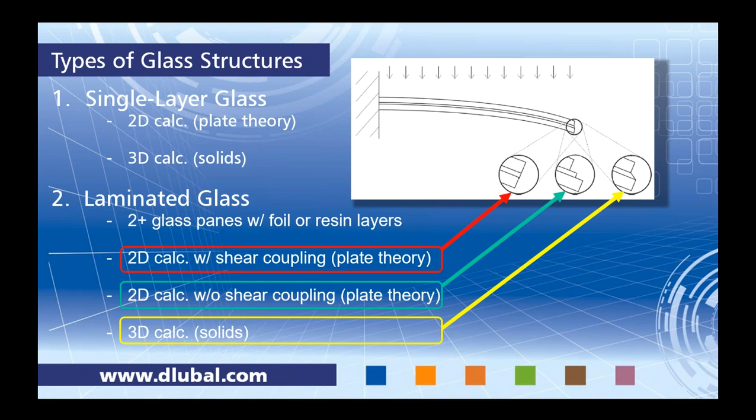Like I said, this is certainly the most accurate option. A downside to this, though, is that your solve time will be longer than typical plate theory.

Now, the third option is insulated glass, shown here by this picture. We have two glass panes on either side, a primary seal, a secondary seal, and then a spacer with our gas in between the two glass panes.

This will always use large deformation analysis. With the other two glass types, we can do a linear analysis or a large deformation, and typically with plate theory, you're running a linear analysis. But for insulated glass, we actually only give you the option for 3D calculation with solid elements. That's because when you throw in this gas layer, there's really no other way to get the accurate behavior of the shear coupling between the glass layers with anything other than solids, meaning that plate theory with 2D elements is not applicable for insulated glass.

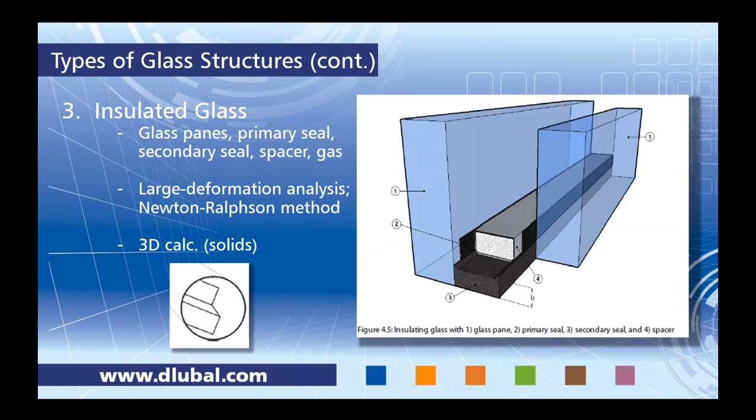And I want to now discuss the calculation types in RF-GLASS. So over here on the right, this is our add-on module, RF-GLASS, just a dialog box. Down at the bottom, you will see that we have two different calculation types to choose from, either local or global. This whole section might seem a little bit confusing now, but I think as we run through our examples today, it will make more sense.

So the first being a local calculation. That is where an individual glass surface is analyzed in RF-GLASS. Despite having any supports or boundary members drawn in RFEM, we have to redefine those supports and boundary members in RF-GLASS. With the local calculation, we can either do a 2D or 3D plate theory or solid analysis. And with insulated glass, this always falls under the local calculation because, like I said, we can only do a 3D analysis type with insulated glass.

Now, the other option is a global analysis where the entire model in RFEM is considered. So therefore, things like supports and boundary members that were originally modeled in RFEM will be taken into RF-GLASS. The caveat with this is that we can only do 2D plate theory for this type of analysis.

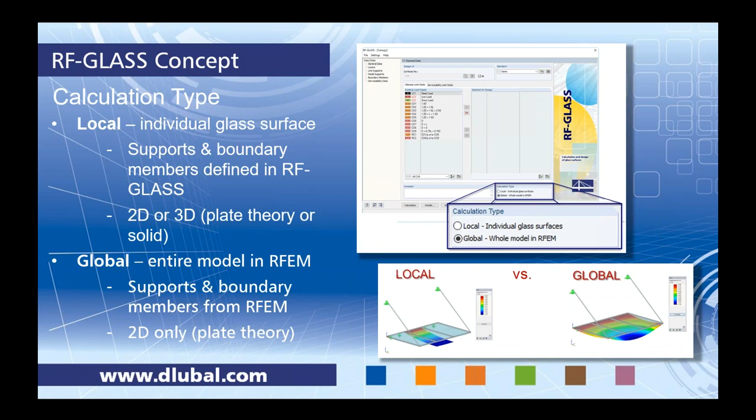So you're probably wondering, well, why would I ever want to do a local calculation if I have to redefine supports and boundary members? Two reasons for that. One, we cannot do a 3D solid analysis with a global calculation, so if you have insulated glass or very thick glass layers that a plate theory won't give you accurate results for, the only option is to run a local calculation. The other reason is that the support types as well as the boundary members can be identified in RF-GLASS in much more detail than what you could ever do in RFEM. That's kind of the advantage — we'll see that when we go through some examples today of local versus global.

So with that, we can jump into RFEM. When you begin a new model, you will see this general data box pop up. We just need to first give it a model name, so I just gave it some arbitrary name.

I have the load combination set to ASCE 7. You can see here that we have the Canadian load combinations as well as many international codes as well, and then I have the checkbox to create those combinations automatically. I also always open up my template model. Any model can be saved as a template model, meaning that maybe you have your grid settings the way you'd like, your printout report, your unit set exactly how you want. So then every time you open this template model, everything is ready to go, and you don't need to adjust anything next time when you open up a new model.

So if I click OK, then this will go ahead and open up a new model for us. I'm not going to spend too much time today on modeling techniques — we're really just focusing on glass analysis today, but if you are interested more in general modeling in RFEM, we certainly have plenty more webinars such as this recorded on our YouTube channel. So how I'm going to begin now is I'm going to draw a line element.

You can see here that we have obviously a single line element, but we have many more options such as polylines, ellipses, arcs. Basically any CAD-like feature, you're going to find a lot of those in the program itself.

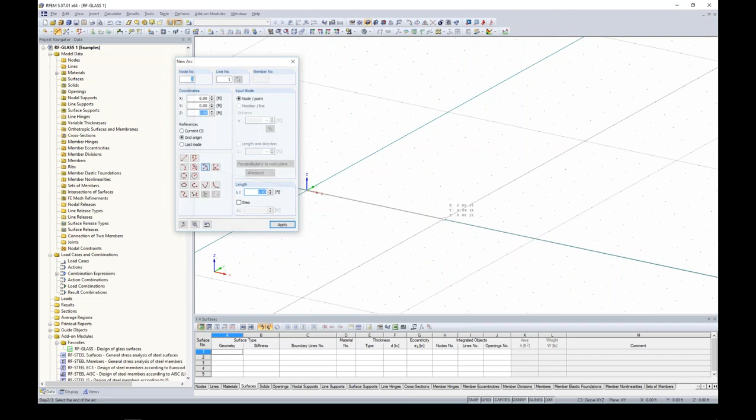For this option, I'm going to choose an arc by defining first my points at 0 and 0, and then I'm going to use my snap point to 6 feet. Now you can see I want to define my radius. I want to actually reverse the orientation and define my radius at 6 feet. So now I just have a simple line element.

This isn't a member, it's just a line. And then I can actually select this line, right-click, and extrude the line into a surface.

If you were present in my last webinar on cross-laminated timber, the glass module somewhat acts the same way. The program is asking us now what material we want to use when extruding this line into a surface. Realistically, this doesn't matter right now for glass. This concrete is just a placeholder, so it doesn't matter if I choose concrete, steel, or aluminum. It's just simply a placeholder.

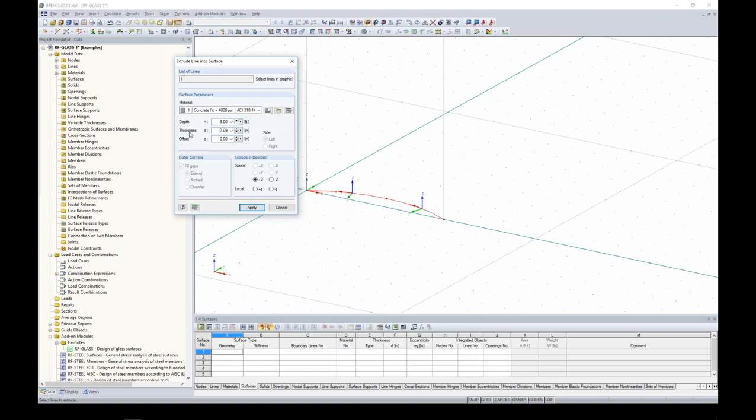The height, though, we do want to specify the correct geometry in the program, with the exception of the thickness. Thickness doesn't matter either because all of our layers and such we will be defining in RF-GLASS. So if I hit apply, I can see that I have this surface now created with just a few clicks of a button.

The next thing to consider is maybe we have some type of handrail on our glass panel here, and I don't want to model the handrail itself, but I'd like to create a line so that I can add a line load to this surface.

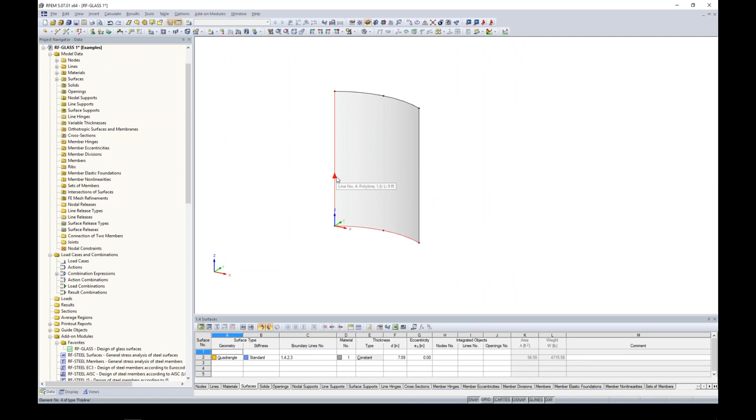So all I'm going to do is select this bottom line here and use my move and copy tool to move it up 3 feet in the positive Z direction. Now you can see that that line is integrated in that surface.

So quickly adding some load cases. Here I will go ahead and add my first load case, dead load, and you can see that self weight is automatically checked on for self weight.

I'm going to create a new load case called wind load pressure. You always want to define the correct action category, and the reason why is the program automatically created all of these ASCE load combinations. If you don't apply the correct action category, you're going to get the wrong load factors.

So I'm going to make a quick copy of wind load pressure, but call this one suction, and then make one more load case of live load and give it the live action category. Okay, so I can click OK here.

Now, if I go to my drop-down box, you'll see that the program automatically created all of those ASCE load combinations. I'm going to skip dead load for now, we'll just consider self-weight, but for wind load pressure, we want to add our first surface load.

If I right-click, I can turn on my local axis system, and I want to add a new surface load. Because we have a curved surface, I want to apply this wind load pressure on my surface in the local Z direction. You'll notice down here the little picture updates depending on what direction you're applying your load to, which is nice. So in this case, I want the local Z direction.

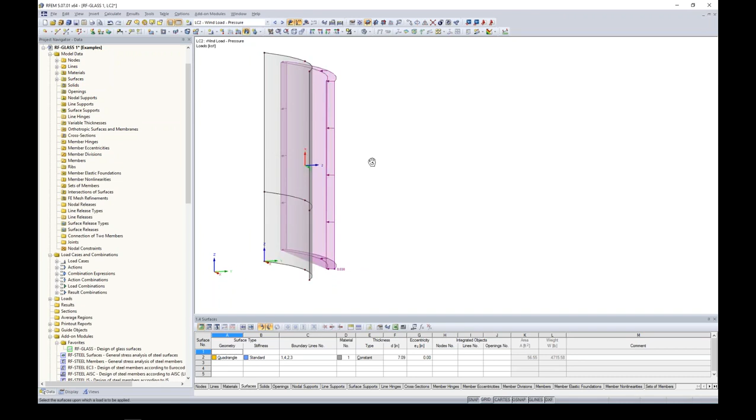I'm going to switch load cases to suction. I'm going to again add a new load in the local Z direction, but this time it will be 0.02 KSF on the other side.

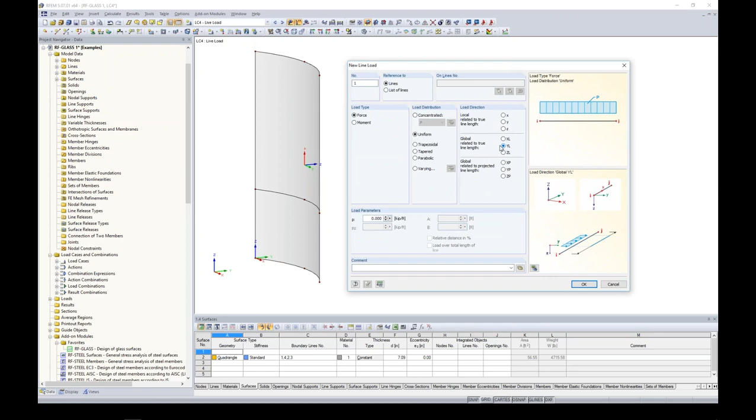And then lastly, we have live load where I will add in a new line load. This I'm going to apply in the global Y direction with a magnitude of 0.07, and then all I need to do is click on that line. So now we have all of our loads added to this surface.

All of our load combinations are done. I want to check my finite element mesh settings. So if I go to calculate and FE mesh settings, the default is set at 1 foot.

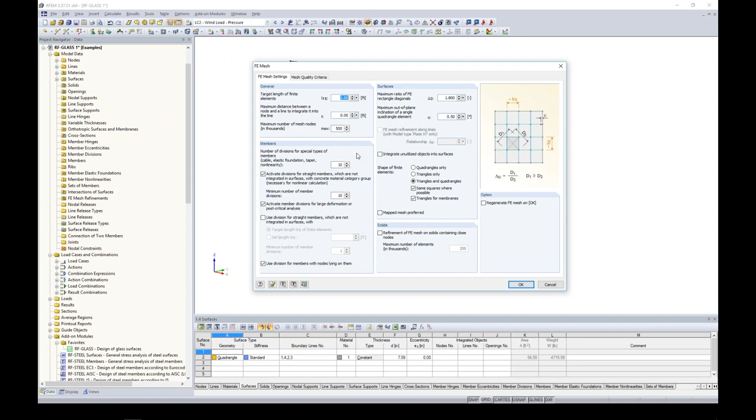The length of 1 foot would probably be okay in this situation since we don't have much going on in this surface, but it is only 6 by 9 feet. So maybe we want to decrease this to something more like 0.5 feet.

If I go to calculate, generate FE mesh, now we can see the FE mesh is automatically generated. Keep in mind this is different than some of the other programs in that all finite element meshing is done automatically. If I were to move this line up an inch, everything would automatically be readjusted, so you never have to worry about changes happening in your model and the finite element having to readjust that manually. Everything is done automatically.

Now we are ready to jump into our add-on module. We have this extremely long list of add-on modules, but if I right-click on any of them, I can select it as my favorite, which will automatically move it up to the top of the list. So now I can launch RF-GLASS.

Taking a look at RF-GLASS, as I mentioned, this is the add-on module, nothing more than a dialog box. You can see here that all of our load combinations were brought over from RFEM. The first question it's asking us is what surface do we want to go ahead and design, and you can check the all checkbox since we only have one surface.

The other couple things to note here is that we do have the German annex for the standard to go ahead and do glass design. For us, we're going to be doing just an analysis, so we will be choosing no standard. There's a little bit of a translation issue right now, but don't worry, that will be fixed soon. This is none in German.

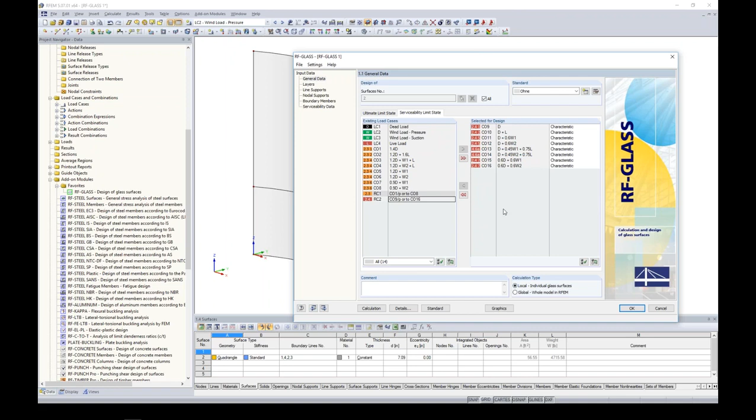Remember back to the PowerPoint, this is what we were discussing on local versus global. My two examples now will be local, so the first one will be local, individual glass surface. We'll focus on that and then we'll get into global a little bit later.

With any add-on module, you just simply work down the list, extremely intuitive to use. The program kind of sets up your workflow for you.

So we're moving on to layers here. It's asking us, okay, so we can create a new composition. You can rename this, and you can create as many compositions as you'd like for different surfaces in your model. For us, we'll obviously only have one composition for our one surface. We need to select which surface this applies to, and we can define our first layer type.

Our first layer type will be glass, and here will be the option to jump into our material libraries database. Typically the standard when you select this will be under the material category glass, and all of these options will be listed. We don't quite yet have the ASTM materials in there, but really that's no problem at all. I added this thermally toughened float glass to my ASTM standard.

Anytime that you add in a new material, this will of course be remembered for any future files or models that you were to create with this glass module. All of our properties are shown in the same dialog box, so everything is okay there. Now my thickness, I want it to be 0.2 inches. Again, all of our material properties are shown to the right here.

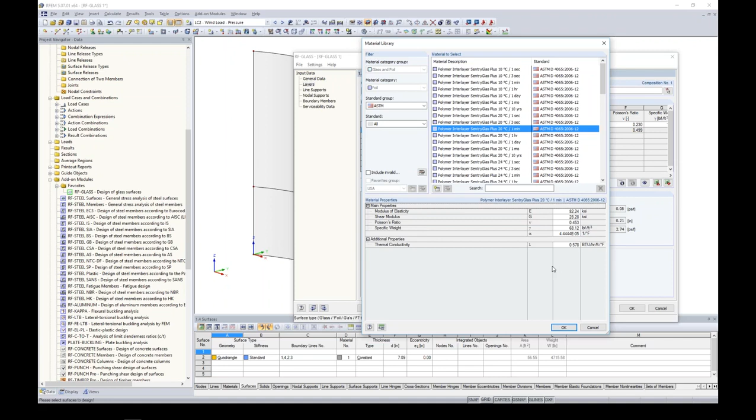Our next layer will be foil, and with this, believe it or not, we actually do have a lot of ASTM foil materials already integrated in the program. For this particular case, I will use 20 degrees Celsius at 1 minute. Again, the foil material properties are shown here. The thickness of 0.01 inches is fine.

And lastly, I choose my last glass layer. The program's smart enough to know that I used ASTM for my last glass layer. I'll also use the same thickness, so that's nice that we don't need to go back into the material library. We don't even need to define a different thickness if we don't want to.

One thing to note here, you can export or import directly from Excel. So if you have some crazy complicated glass layering going on and you have all the properties defined in the same format in Excel, at the click of a button, you can go ahead and import it directly into the program.

So I'm going to edit my composition details, and this brings up a lot of what we were discussing in the PowerPoint. You can see here with my method of analysis, I have either a linear analysis or a large deformation analysis to choose from. For right now, I'll just go ahead and stick with the linear analysis.

Now, the modeling of the laminated glass, I have either 2D or 3D, so we understand plate theory versus solids, but this third option is something we didn't discuss. The program can automatically turn a 2D model into a 3D solid element model if the ratio of the shear modulus times the thickness of the glass over the shear modulus times the thickness of the foil is greater than some ratio. The default ratio is 1,000, but you can change this to whatever you'd like. So if your depth of your glass layers is getting a little bit too thick for a plate analysis, the program can automatically turn that into a solid model. For us, we'll just stick with 2D to keep it simple for this first example.

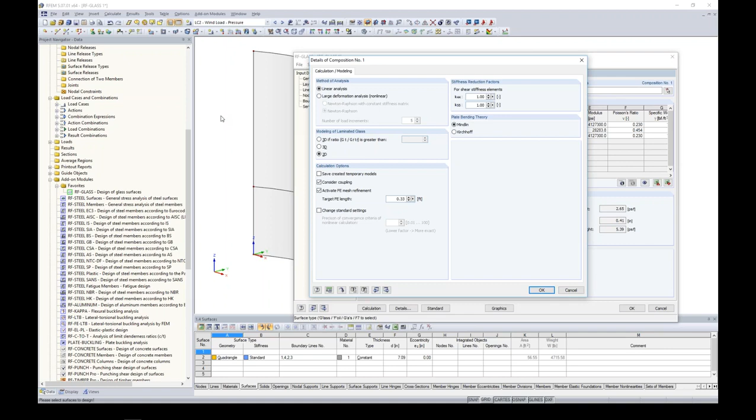Consider coupling. Remember, with plate theory, we either have rigid coupling or no coupling at all. If I uncheck coupling, I no longer have the option to turn it to a solid analysis. Activate FE mesh refinement—this is if you wanted to change your FE mesh of this surface only, or any of the surfaces that you define for this composition. This is nice because I don't have to go back into RFEM and redo my finite element if all I want to change is the surface in here. So that's certainly an option as well.

Okay, also notice that we get this nice picture here of the different glass layers. Depending on which line I'm clicking on here, this arrow will be synced with whichever layer is shown in this little diagram. Something important to note here: the local axis Z, the positive direction, is facing towards the bottom of the glass. So this is the bottom of the glass, and know that the positive Z axis of our surface is also pointing towards the bottom of the glass.

So for this example, it doesn't really matter because we have symmetry between the top and bottom layers, but our next example will be different than that because we won't have symmetry. So you want to make sure that the local Z-axis and the bottom of your glass are aligned correctly.

All right, moving on down our list, line supports. In RFEM, I didn't define any line support. So if I were to try and run that model right now, I'd obviously get an instability because I have nothing supporting that surface. So this is where I was telling you, in RF-GLASS, we can go ahead and define these line supports.

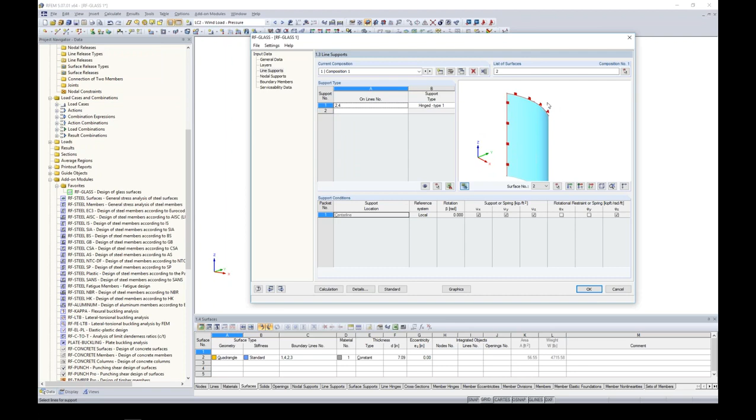The first thing that I need to do, and you'll notice here I have my picture, I can rotate it, I can scroll in, is to choose my first lines. So if I choose them graphically, using my AutoCAD type features of just dragging a selection box, I chose the left and top lines here.

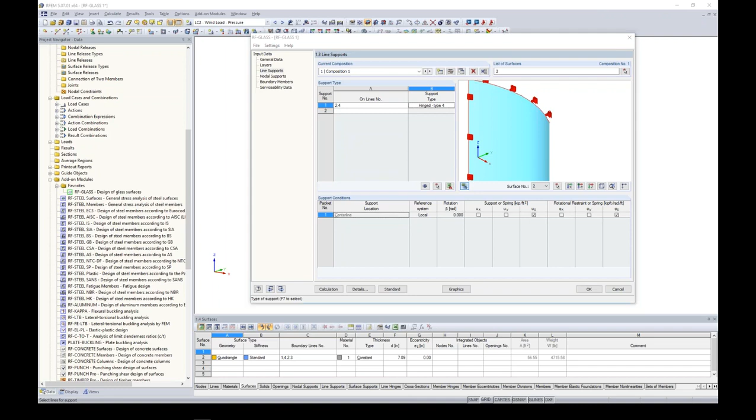And if I click on support type, you will see all of these different hinged options. As I go ahead and scroll through these, you'll notice that the support types are changing down here. If this still doesn't make a whole lot of sense to you, you can always click on this help manual here, and what this does is it will bring up our manual for RF-GLASS, and if you scroll down just a little bit, here are all these different hinge types.

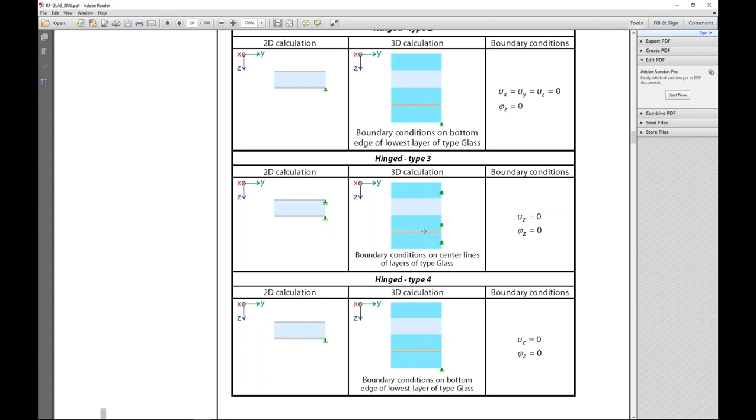And it's nice because it's set up in a way that, okay, if you're doing plate theory under the 2D calculation, this is how the hinge type will look. Now, if we're doing a solid model, this is how the hinge type would look—hinge type 1, hinge type 2. So this is what I was saying, that the benefit of using a local analysis in RF-GLASS is that you can get very detailed in how your glass layers are supported. In RFEM, you don't have these options—you can do it, it's just much more complicated. So in RF-GLASS, it allows you to get a little bit more detailed.

So for us, we will choose hinge type 3. Then I want to choose my other 2 lines here.

And I can always select a user-defined type as well. I don't have to use these already determined hinge types in here, and maybe I want to unselect translation in the X direction. Keep in mind you can always select springs as well, so you don't necessarily just have to have a free or fixed situation.

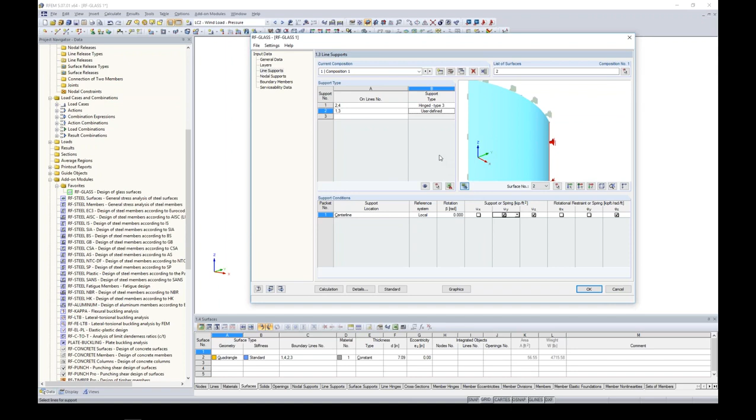Moving on down the line to nodal supports, exact same concept. Just if you were to have nodal supports instead of line supports, this is where you would go ahead and define it. Boundary members - so it's not uncommon to maybe have something like a channel member up at the top here of our glass surface.

Well, I didn't model that in RFEM, and because I'm using the local glass analysis type, I want to define that boundary member here. So the first thing I need to do is select where I want that member to run. You'll notice everything is just set to center line because I'm using 2D plate analysis - I don't have any cross sections defined in RFEM.

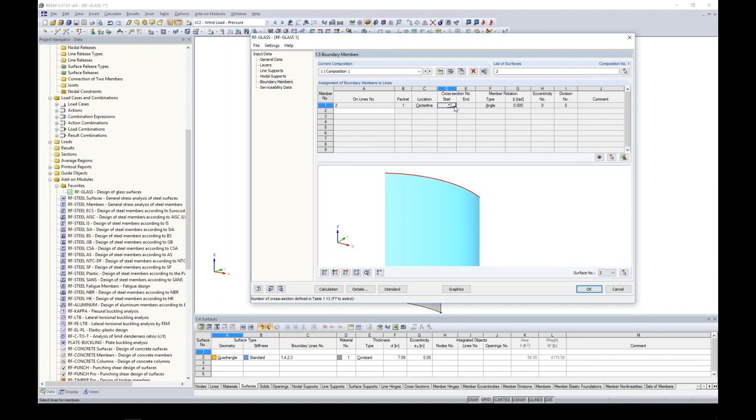Normally you would think, okay, I probably need to go back into RFEM to create some cross sections, but the nice thing is I can do everything from this add-on module. So up pops my cross section library. For this case, maybe I'll choose a type of channel here just for geometry purposes, and here are all my AISC shapes. Maybe I want a 3x5.

Concrete is obviously not the right material for this, so we can easily edit this as well and jump into our material database. Maybe we want something more like aluminum from the ADM. Well, I already have aluminum set in one of my favorites group for USA as 6063 T6. Here are all of my properties for that particular material.

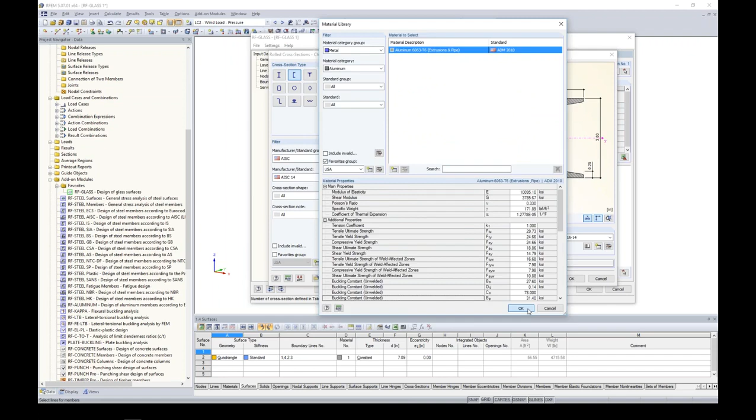I can click OK on all of these, and if I zoom in, I have a nice rendered shape of my channel. You can also rotate it if you need, and the program will automatically update that as well.

So for analysis purposes, we certainly want to take into account the stiffness from this member here - that's the whole purpose of defining boundary members. Maybe you have a boundary member with nodal supports on either side instead of a line support. That can all be modeled in here as well. So this is just for example purposes - I will delete this for now.

And lastly, we will jump into the serviceability data. This is nice in the sense that if I go to my standard button down here, I have my serviceability limiting deflection ratios. I have 3 different types of combinations - characteristic, frequent, and quasi-permanent - and you can see I can change these ratios for these 3 different combination types to whatever I'd like. Default is L over 100, and for cantilevers it's L over 50.

If I go back to my very first tab under serviceability, here's where those 3 different combination types fall into place. So if you want different limiting deflection ratios for these different serviceability load combinations, it's possible to do it in one analysis without having to rerun several times with different deflection ratios.

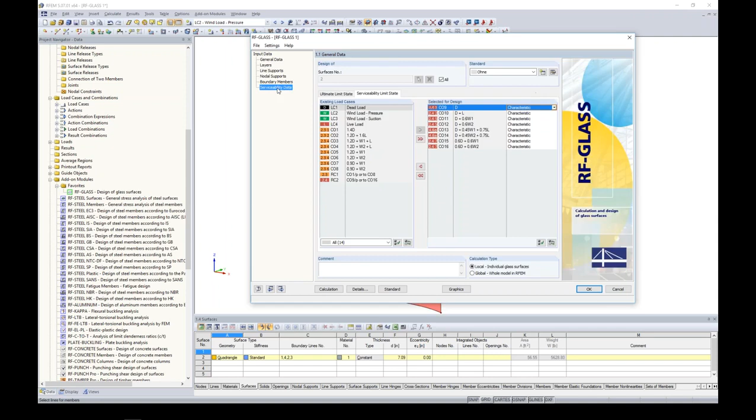The only thing I need to define is my surface. Now the reference length - do I want to use the minimum borderline, the maximum borderline, or do I want to define my own? In our case, a conservative option would be the minimum borderline at 6.28 feet, and if it was a cantilever, I could check this option here.

Last thing to check is the details button. You can see we have all of these options for what stresses we want to show in the final analysis, so I can easily uncheck any of these if I don't want to see them, or check them if I do. Under the results, there are a few other options for what you want to see in your calculations - for example, maybe we want to see line support reactions.

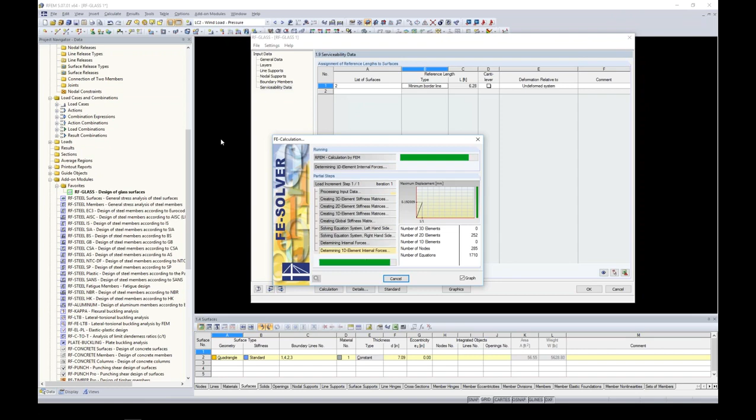And with that, we are ready to solve. So what the program's doing now is taking each stiffness layer from the glass, creating a more global stiffness, exporting it back into RFEM, rerunning the analysis, and now bringing all of the results back into RF-GLASS. And now we have this results menu available.

Here we can view our max stresses and our ratios by either the loading. So we have our different load combinations, load combination number 1, number 2, number 3, and remember this is ultimate limit design. We also have our max stress ratio by the surface. We only have one surface defined, so of course we only have surface number 2 shown here. And then we have our max stress ratio by the composition.

We only have one composition defined, and with this we will get our different stresses for the different layers, layer number 1 and number 3. We have our existing stresses due to the actual load combination, and then we have our limiting stresses, and of course we get a ratio. The max ratio is shown down here. We have a nice green smiley face because it's well under 1.0.

The other thing to note is that you can export this directly into Excel. Excel obviously has a lot more capabilities in terms of sorting data and such. So this is a nice feature to have if you want a little bit more control over that - just click the button. It automatically opens up Excel and brings all of your data in there automatically.

You'll see here that we have our stress diagram shown. We have a rigid coupling, so viewing the stress diagram this makes sense for what we're seeing. We have obviously a relationship between our top layer and our bottom layer with our stresses, and in between is the foil layer. We can see our line support reactions in a table format, as well as the max displacements.

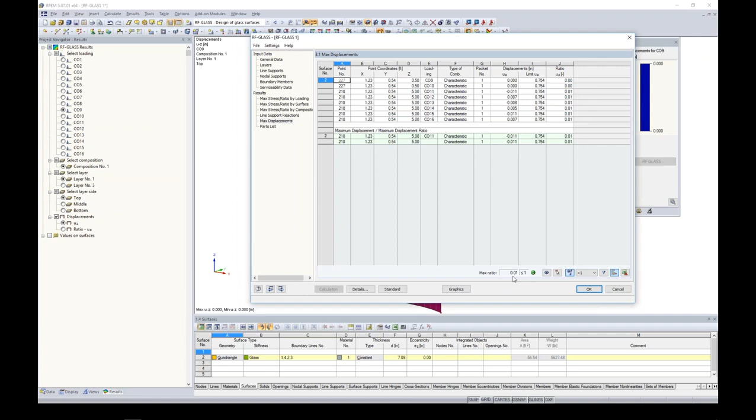Remember, these max displacements are based on the ratios L over 100 that we gave it, and then we get our ratio of our limiting deflection as 0.01, well under 1.0, so we're perfectly fine there. And lastly, we get a parts list or material takeoff for the surfaces that we defined in this add-on module.

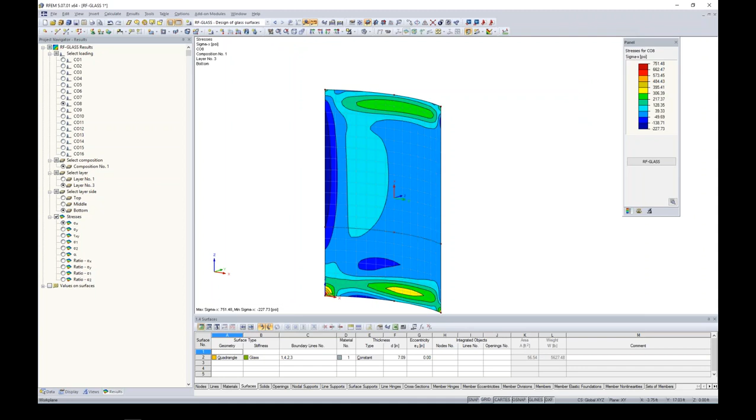Jumping back to the max stress ratios by either loading, surface, composition, there's another option down here called graphics. And with graphics, this will immediately bring us back into RFEM, and here we can view the different stresses by contour lines. So you'll notice that the results option popped up here in our project navigator.

If I look up here, it shows me that I'm still under RF-GLASS. Even my drop down here shows me I'm under the results of RF-GLASS, and here I can easily jump right back into that add-on module. So it's nice here if you want to visually see what's going on with these different stresses.

Okay, so that concludes the first example. Now, for the second example, I'm going to use this same surface, but I'm going to turn this into an insulated glass example. Time savings - the geometry is already created, the loading's already created, and we're just going to see a lot of the similarities and differences between a 2D plate theory versus an insulated glass solid model.

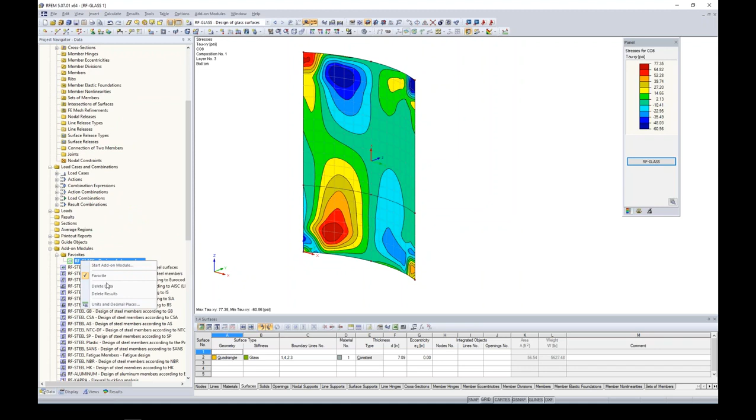I'm back in my data tab under my project navigator, and what I can do is right click here on RF-GLASS and delete all of my data. It's asking me, do I really want to delete this? Yes, I do, and we are back to square one with just a simple glass surface shown now. So here I will launch my RF-GLASS again, and we don't need to spend much time on some of this.

One thing I do want to do real quick that I forgot - let's go back into our load cases, and I want to create one more load case here called climatic load. This is for my gas pressures of my insulating glass that I'm about to create. I'm going to choose the action category here called self-straining force.

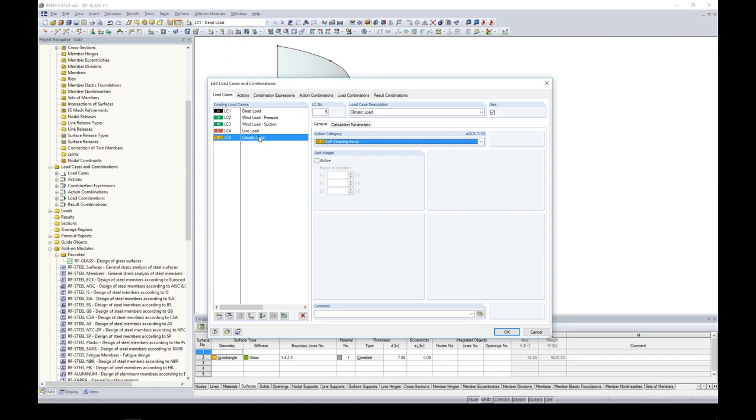You certainly can put your climatic loads into any one of these load cases that you want, but keep in mind, maybe climatic loads you want a load factor of 1.0. When you put it in with dead load, well, now it has the same load factors as dead load. So most likely you're going to want to keep them separate from these other action categories, which is why I created climatic load. This does have a load factor in our ASCE load combinations of 1.0.

So I can launch RF-GLASS again. Now you can see that my load cases are a little bit longer. I now have this T for temperature included in here as well. So for ultimate limit state design, I'm choosing all of my LRFD equations, and for serviceability, I will choose all of my ASD load combinations.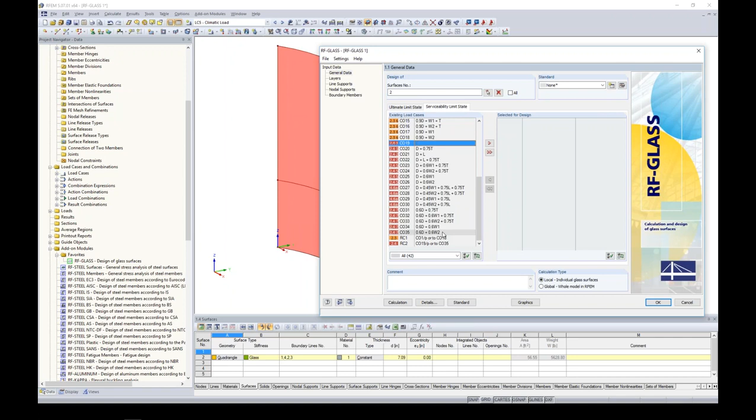We are still going to stick with the German none here for our standard, and the calculation type will be local. Again, this is another local design, but you'll see here under layers that we want to first choose our surface. Nothing new here. Now our first layer type will be glass. The program remembers the ASTM. This time I want a thickness of 0.6.

Then I want to create my next layer of gas. The minute I put in a gas layer, the add-on module says this has to be a solid analysis. I can no longer do plate theory. That's just a limiting effect. When you choose gas, there's no way to do a plate analysis.

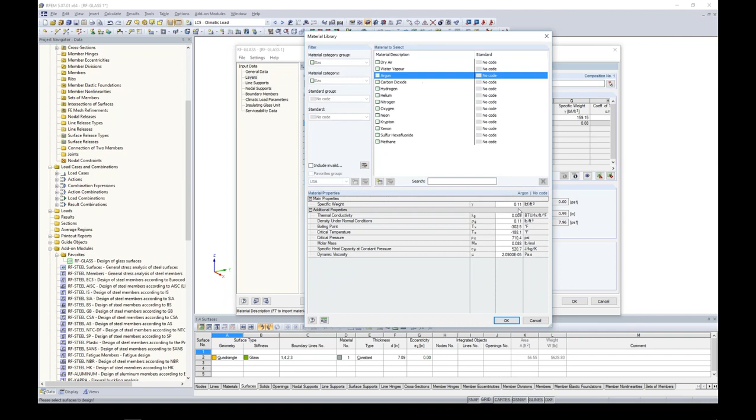For my materials library, for my gases, these are the options that are already default in the program. Argon is a pretty common one for insulating glass. Here are our properties, shown here. Maybe I want my thickness to be 0.65. I'm going to choose another glass layer of 0.50. And then a foil layer, we'll keep it at 0.01, that's fine. And lastly, one more glass layer at 0.5.

Now let's take a look at our details of this composition. You'll notice some changes in comparison to what we were reviewing last time. Linear analysis is no longer an option. We only can do large deformation analysis. As I mentioned, Newton-Raphson is the type of large deformation analysis we will do.

You do have the option here to choose a constant stiffness matrix. This will obviously speed up your calculation time a little bit, but maybe not as accurate of results, because you're not getting that nonlinear behavior with the different stiffness matrix for each iteration. It's up to you though on which option you'd like to choose.

Number of load increments runs parallel with our finite element mesh. Anybody who's done finite element modeling knows that if you have an extremely large mesh, you can get very inaccurate results. However, if you continue to submesh your elements to something very small, your solve time also increases, and at some point your results aren't going to change very much. It's the exact same thing with load increments. Maybe one load increment won't give you the correct results, but maybe 10 is too many. It slows down your solve time, and your results aren't any different than what 5 load increments would have been. Default is 5 here, but you can feel free to change this if you'd like.

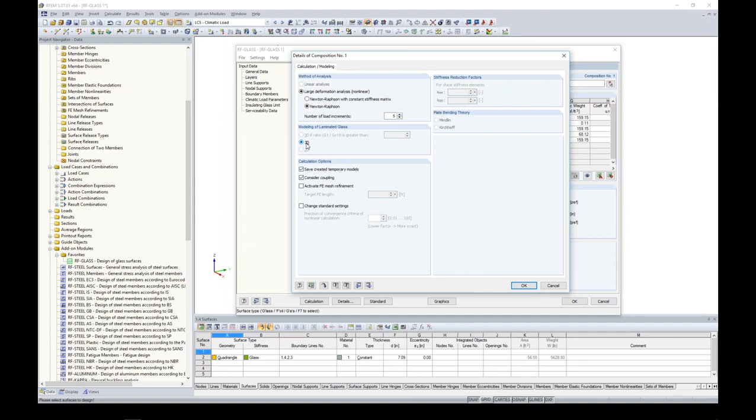Remember what I said with the local z-axis direction pointing towards the bottom. Most likely this is going to be the external part of our surface, our glass layers. And if I were to double check this, everything looks okay, that the local z-axis is the bottom here.

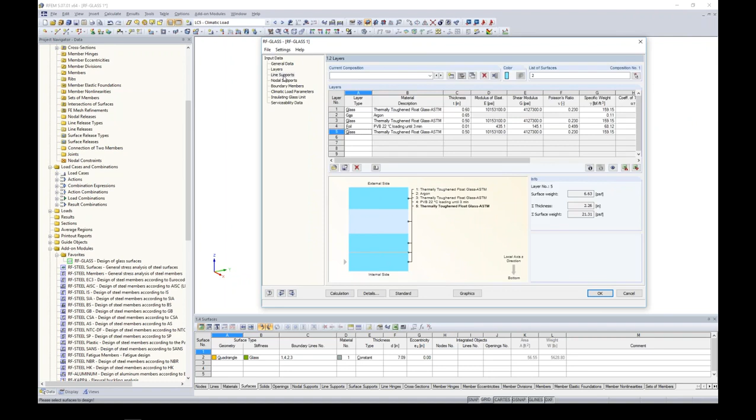Moving on down the line to supports, nothing new here for the most part, so I'll quickly run through this. There is one thing that I do want to show you. If I choose hinge type 3, just like we did last time, you'll notice now that I have 3 different layers, whereas before I only had one option. So with solid elements, if I zoom in here, you can see now that I have these different solid elements where I can apply these nodal supports at the different layers. As I scroll through here in the table, the little picture updates on which layer I'm at.

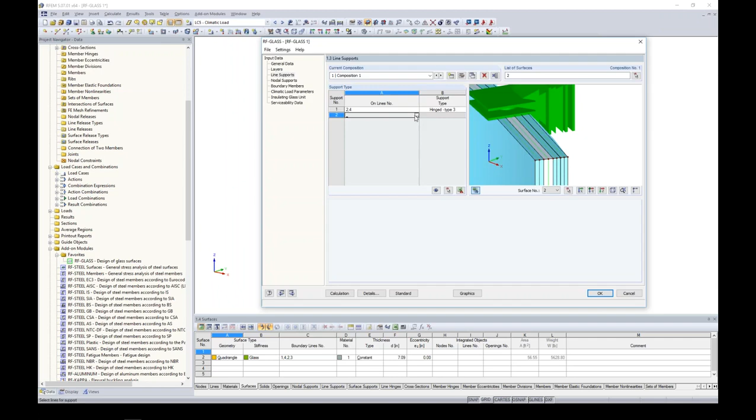So that's nice, that everything is synced here so that I can see how exactly I'm applying these line supports. Same thing with the bottom line and the right line. Maybe we want to choose user defined here. I'm going to release translation, but now I need to do it for all 3 layers. Nodal supports, same setup. If we were to have nodal supports, we will skip this for now. Boundary members, same concept as well.

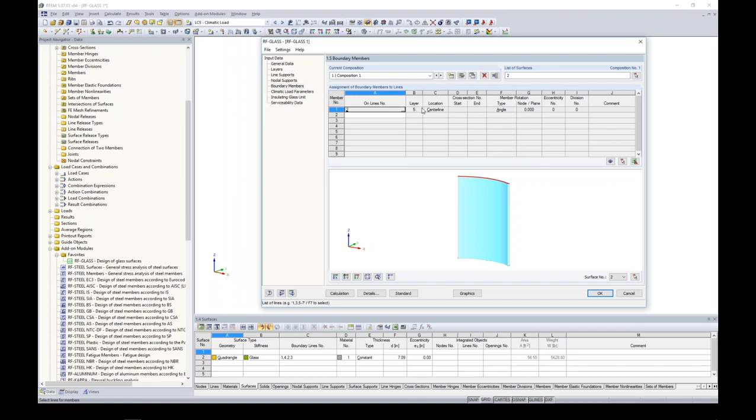The one thing that I did want to show you, if I do choose the top line again for, let's say, that channel, now I get to choose which layer I want to place that channel on. Scrolling down in here, if I choose layer 1, the picture down here will jump to that layer. I can also then choose upper edge, center line, or the lower edge within each layer of where exactly I want to place that boundary member. So this is what I was saying, that RF-GLASS allows you to really get detailed, especially with this solid model, and how exactly these supports as well as boundary members are framing into your glass panel.

Again, RFEM would not allow you to do this very easily. This is just for demonstration purposes once again, so we will delete this row.

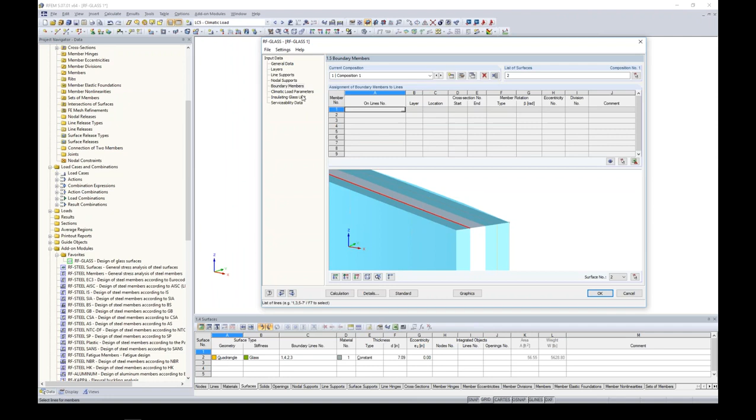Climatic load parameters. This is something new that popped up when we defined a gas layer, since we probably need to take into account some climatic loads. There's a checkbox here, automatic gas temperature calculation. If I check this, you'll see we get some very complex variables. Realistically, unless you're a glass expert and you really know what you're doing, you probably will never have this checked on. It's all kind of behind the scenes, but it gives you control over some of the variables if you want.

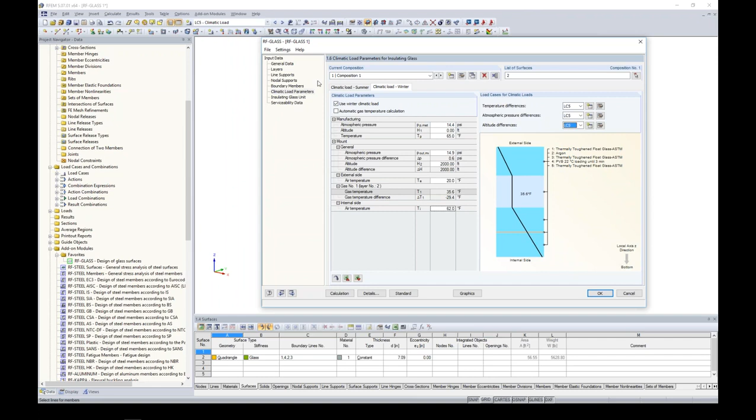Moving on down the list, insulating glass unit - here is where we can consider our secondary seal options. For this, I want to jump back into the PowerPoint quickly, because this is actually a little bit more complicated than what you would initially think. For a secondary seal, there is the option - this is exactly what we were just doing, what you just saw in the RF-GLASS module.

If I had this option unchecked, there is the use helper supports on gas layers, that's now grayed out in the program. So what exactly are these helper supports, since there's not much information in the add-on module itself? When I have the secondary seal unchecked, meaning there's nothing there, these helper supports will be applied on our glass surface. Taking a look at this picture, glass panels are pretty stiff, maybe around 10,000 KSI. However, RFEM will model a soft material at either end, something closer to 1.5 KSI.

Now, when we don't have these helper supports applied, we get some sort of deflection that maybe looks like this. This is obviously not desired behavior. This is from the gas pressures, and then we're getting our deflection at our sides.

Now, when we add in these helper supports, we add stiffness to the ends here, and we'll get more of a desired deflection with our glass panes. So that is the whole purpose of these helper supports.

For us, we will leave this unchecked for now, so the helper supports will be used in the background.

The number of finite element layers in gas layers: our gas layer is only 0.65 inches deep, so 2 layers is probably fine for that. If you had something larger, you can always increase the number of layers. This is something I think is pretty cool for this add-on module.

Force load distribution. You can see my 5 load cases here, and we give you the option to determine what percentage is applied to the external glass versus the internal glass. So dead load, we only have self-weight, maybe we want to apply 50 and 50 to the external and internal. Wind load pressure, we want 100% on the external side of this glass. Wind load suction, we want 100% on the internal. Live load, it's a handrail, so maybe 100% on the internal. Climatic loading, maybe 50 and 50. So a little bit more control on where exactly these loads are being applied to your glass surface.

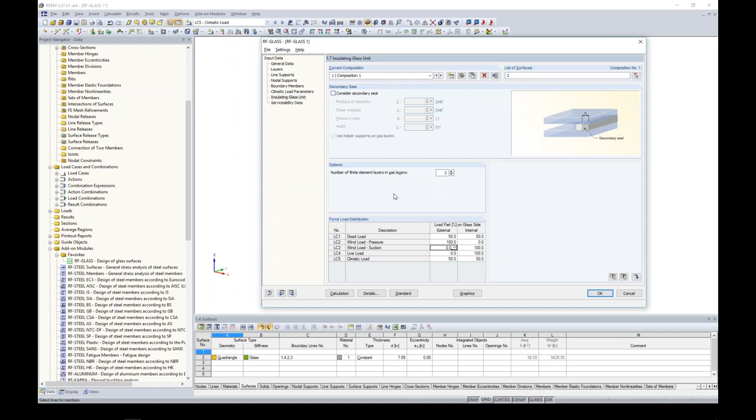And lastly, we have our serviceability data. Here we can just select the surface, and it's applying it back to those service load combinations and the ratios that we've set here.

And with that said, we are now ready to run an analysis. As I mentioned before, a solid analysis takes much longer than typical plate theory, so I already went ahead and ran this result because we don't want to be sitting around for a few minutes with nothing to talk about.

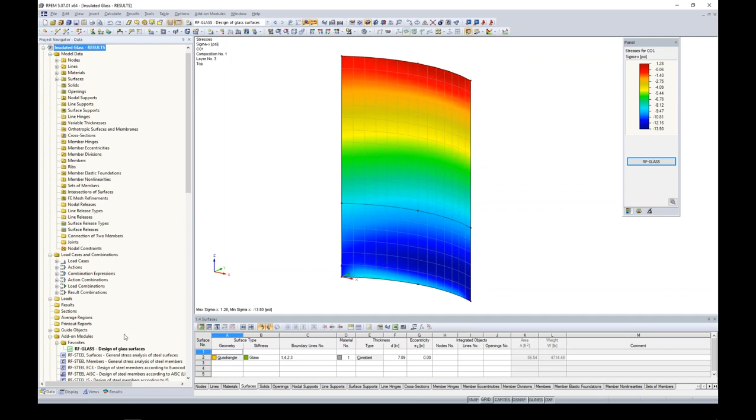So here are the results for this exact same model that we were running. Let me open back up my RF-GLASS module, and this is what it should look like once we're done with the analysis. Nothing really too different from our plate, obviously we're going to have more layers here for our stresses. You can see my max ratio is 0.99 - maybe for design this is a little bit high, we wanted something more like 0.9. Regardless, we still get our green smiley face because we are under 1.0.

Again, feel free to export any of this data into Excel. Pretty much the same thing that you would see before.

The one thing I did want to show you guys is under gas pressure, for example - you can see here the loading CO2 summer, CO2 winter. So like I said, the program creates 2 load combinations, one for summer and one for winter, and here you can see all of your different gas pressures.

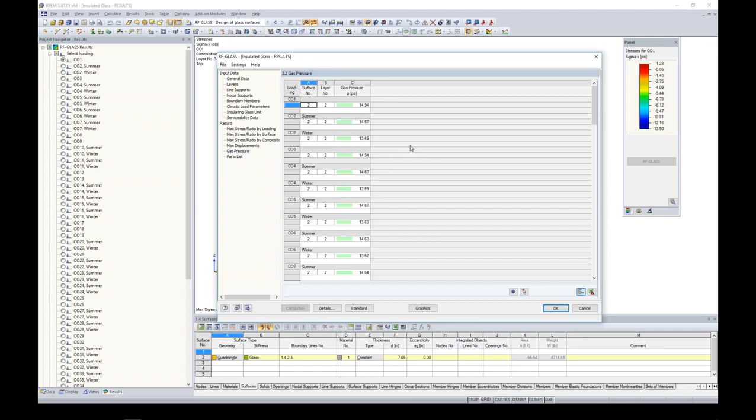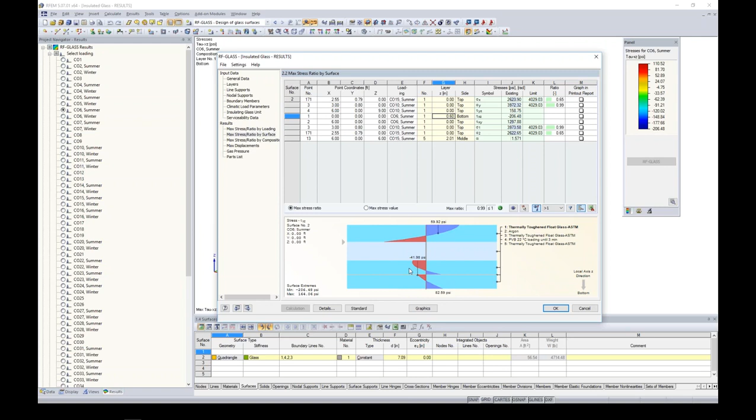Jumping back to one of these stresses here, we can see our stress diagram. Now we have our glass layer, gas - we obviously won't have any stresses - and then our other 2 glass layers. So with this, we get the accurate shear coupling behavior based on the stiffnesses of our intermediate layers, which is modeled quite nicely with these diagrams for each layer.

Jumping to our graphics, again we have control over what stresses we want to see graphically based on the contours. So nothing too different, essentially, than what we saw for the results from our plate theory.

Remember how I checked that checkbox to save the model in the background that it's creating? If I show you my desktop, here is the model insulated glass results. I just saved it to a folder on my desktop, and automatically the program created these three models as well. I had nothing to do with creating these; they were created behind the scenes because I checked that checkbox.

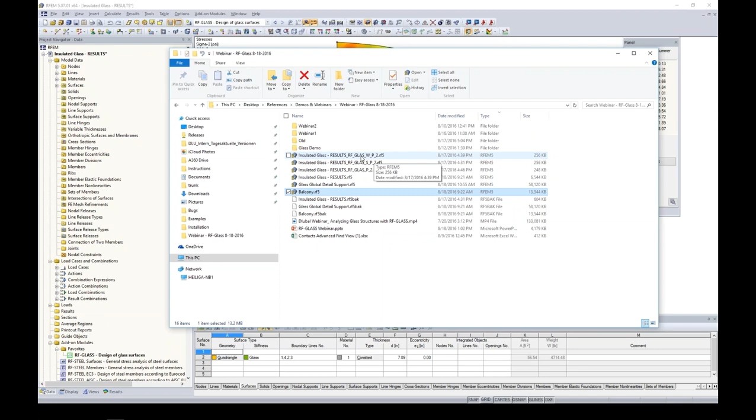You can see here we have W for winter, S for summer, and a third option which doesn't include climatic loading. If I open up the winter one, which I already have pulled up here in my program, this is what I was talking about when I said it creates this model in the background. I can zoom in here and see my solid elements.

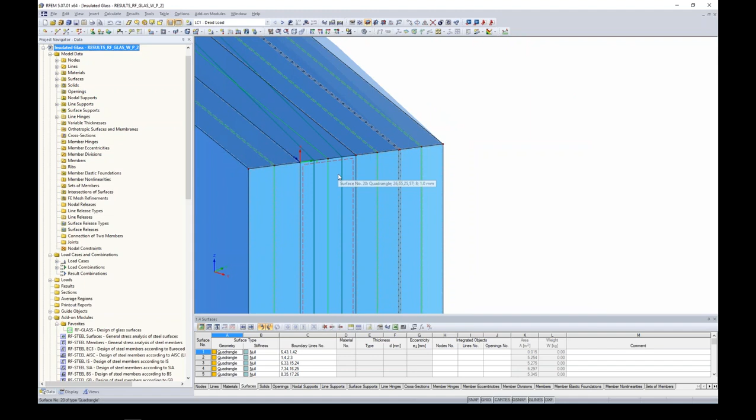I have my first solid for my glass layer. There are two layers here. If I zoom in really close, here's my foil layer, here's my other glass layer, here's my bigger gas layer, and then I have my other glass layer. I can turn this into wireframe too to see what's going on.

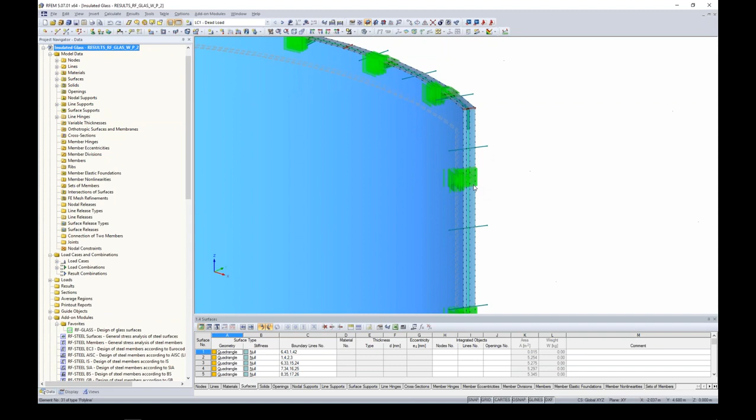The other thing to notice are the supports at all the different layers. This was everything that we defined in RF-GLASS. Like I said, you could sit here and model this in RFEM, but it's going to take you a while. Whereas with RF-GLASS, you just give it some of the properties and the program creates everything automatically, including our climatic loading.

If I show you our new LC5 for climatic loading, we now have these surface pressures on our glass unit. So this is what's going on behind the scenes - the program is automatically creating this solid model for us. I wanted to show you exactly what that checkbox does when we want to save and see these models. Okay, so that concludes the local calculation types.

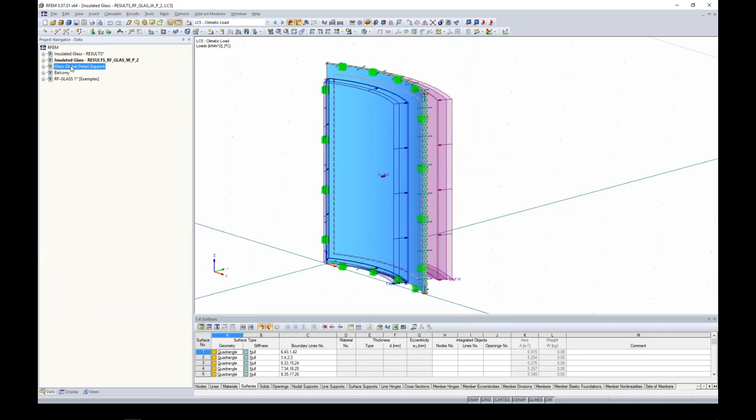So probably everyone wants to know, well, what about the global? Maybe some people are a little more interested in that. Let's take a look at this example here. This was modeled by one of our glass engineers, and I'm going to quickly turn off the FE mesh and our FE mesh refinements.

You'll notice people often ask, can you put holes in your glass? Yes, that's no problem at all. You can see here that this is a glass surface and we modeled a hole in it right here. Now what we also did was model a contact element, a contact surface.

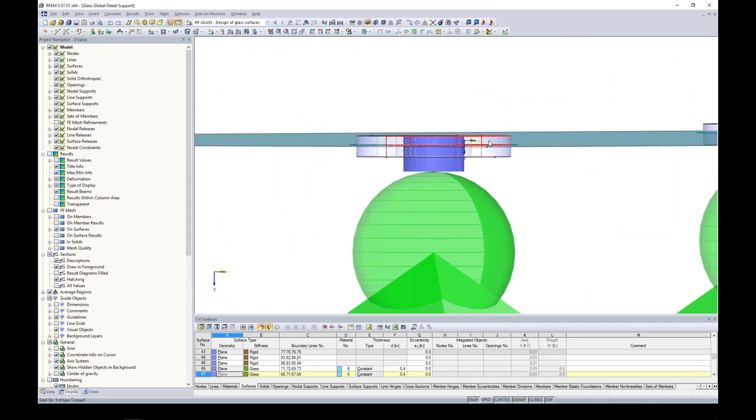This top one, if we click on it, is a rigid surface. If I click on this middle contact surface here - sorry, let me zoom out. If we go into an elevation view, this is really an exact model of how this support will act with this glass panel. If I double click here, I have a contact surface.

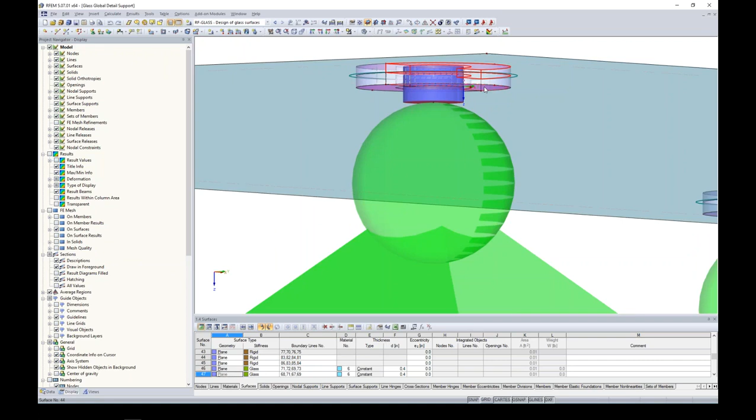I look at my nonlinear settings here, I have failure under tension. So basically this contact support will fail if any tension is experienced. And again, on the bottom we have another rigid surface. So this is just a more detailed modeling of the glass and its supports.

This is something you obviously can't define in RF-GLASS. This was modeled in RFEM, our main program. So let me show you the finite element mesh - let me turn that back on. This is pretty powerful as well.

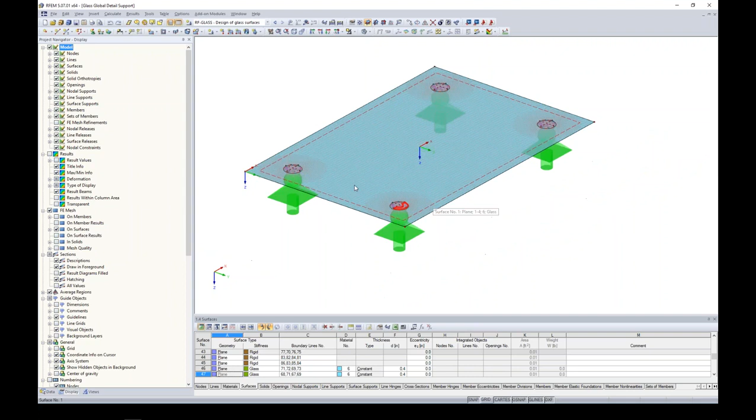The finite element mesh you can see here is set at some arbitrary number. But the other thing we did is add some finite element mesh refinements here, and that's what these circles are about. If I double click on one to take a look, we made a finite element mesh around a node.

We set the inner length to something very small - full precision will show it's at 0.0003 - and then the outer is 0.02 feet. So the program will gradually increase so that we have this smaller finite element mesh at the node here, which is kind of required because we're getting some small elements here.

Jumping into our RF-GLASS module, you'll notice under the general data - and I already ran the results for this - I now have global selected. And with global selected, take a look at the input data: I have a lot less options here. I don't have the options for nodal supports, line supports, or boundary members. I have no climatic loading because I can't analyze any type of insulated glass here. With global, remember that we can only do a plate analysis.

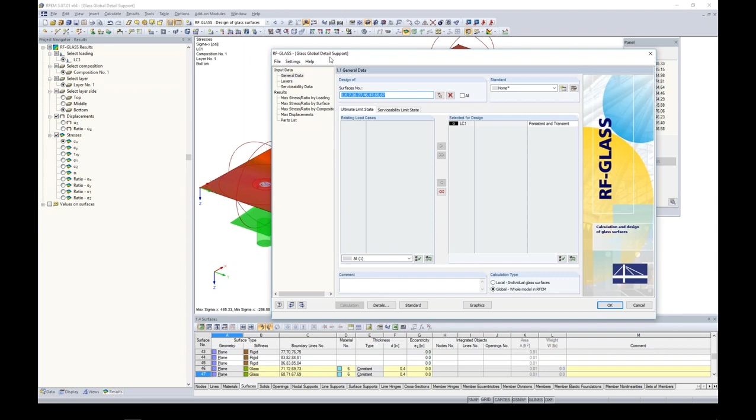So basically what the program's doing is taking all of our supports, all of the boundary elements - it's taking it from RFEM into this.

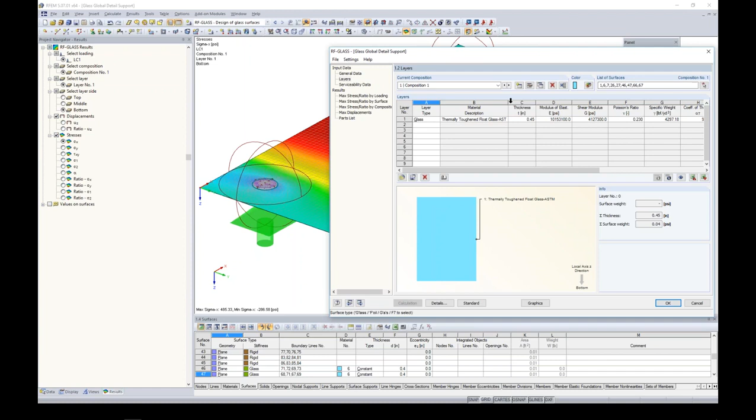The only reason now that we're really using RF-GLASS is to get the correct stiffness for our different glass layers. With this case, we only have one glass layer, thermally toughened float glass, so nothing too complicated here. We still can set our serviceability data according to those ratios.

And then we can run our analysis. We still get our results here for our glass layer. Again, we only have one layer, so that's why our stress diagram looks as such with one layer. And basically, we have the same output type as what we saw before. But keep in mind that this is a 2D analysis.

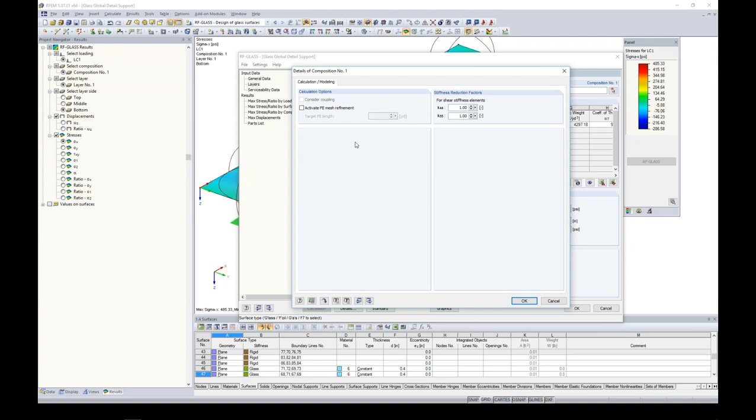If I do go back to layers, I wanted to quickly show you this. Notice that all of the 2D, 3D, nonlinear analysis, that's all gone now with global. You no longer have any of those options. This is a 2D analysis, linear analysis.

Okay, so I can also jump back into my graphics, and we have these nice contours now of our different stresses. Maybe one thing we want to do is to make a section cut through one of these.

Okay, so we can create a section cut. I don't know why it's not letting me do that. Oh, probably because I need to go to the results. Sorry about that. Okay, so choosing one of these section cuts, maybe I want a little bit more detail through these supports here because the contours are nice, but we don't really get any numerical results.

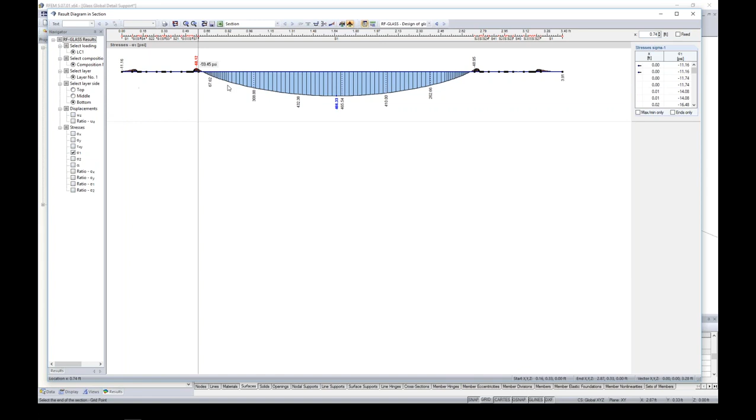Well, here we can go ahead and turn on, let's say, one of our normal forces, sigma 1, and then you can turn on any of the stresses that you like, but here you can view it across that surface where we just made our cut for numbers instead of just purely contours.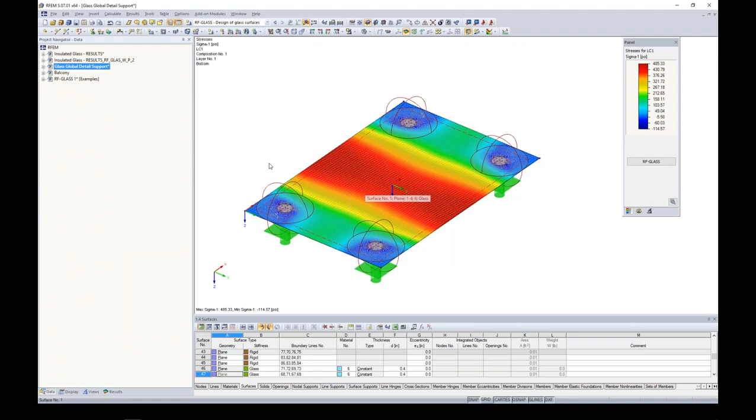And the last example that I want to show you guys, which is probably something you have maybe a full building modeled and you just have a glass balcony or a glass partition that you want to analyze with the rest of this building. So rather than this single glass panel here, maybe you want something more such as this.

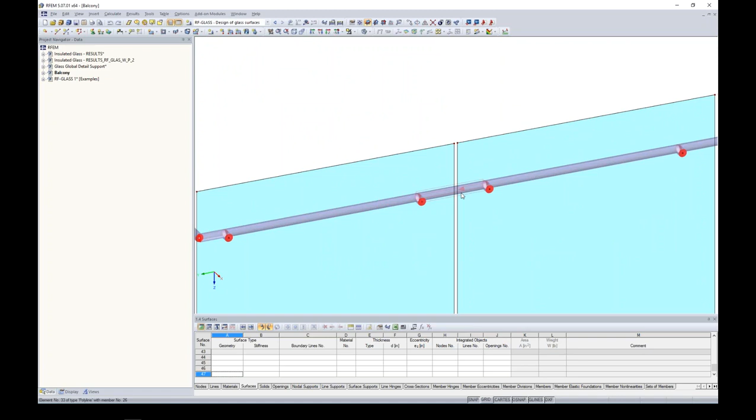So this was modeled by one of our other engineers. It's basically a glass type balcony. You can see here if I zoom in, I have my different glass surfaces. There's a little gap modeled between them. We even modeled the handrail attaching to the glass surfaces by a single node. Then we also have these nodal supports at 4 different points.

I can decrease the size of this so that we can see it a little bit better. I have these nodal supports at 4 different points along the glass. We modeled in a little member to take into account eccentricity.

So this might be something more of an application where you have a bigger structure. You don't want to sit there and just model one glass element at a time. Keep in mind, though, you can always do a local calculation within a larger model. That's certainly possible. You don't have to have just a single surface in one RFEM model. So I could do a local calculation on just this single surface here.

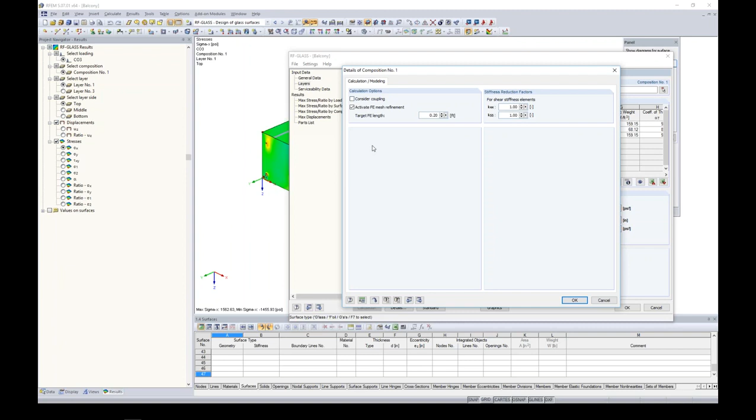So for this case, though, maybe we want to do more of a global analysis. I launched my RF-GLASS add-on module. You'll notice here I have global selected for the whole model in RFEM. Again, similar to what we saw before, this time I didn't consider coupling, so we'll see how the stress diagram is influenced by that, since we have no coupling behavior between the different glass layers. Again, we have no option for 3D solids for nonlinear analysis because we are now in global.

Here, though, are our different glass layers for laminated glass, serviceability data, everything's the same here. Now, taking a look at our results with a max stress ratio by loading, surface, or composition, here's where that no coupling behavior comes into play. Normally, we'd see a stress diagram similar to this top layer throughout the entire depth if we had rigid coupling considered. But we have 0 coupling considered, so we have no interaction between the top and bottom layers. That's why our stress diagrams are completely separate here.

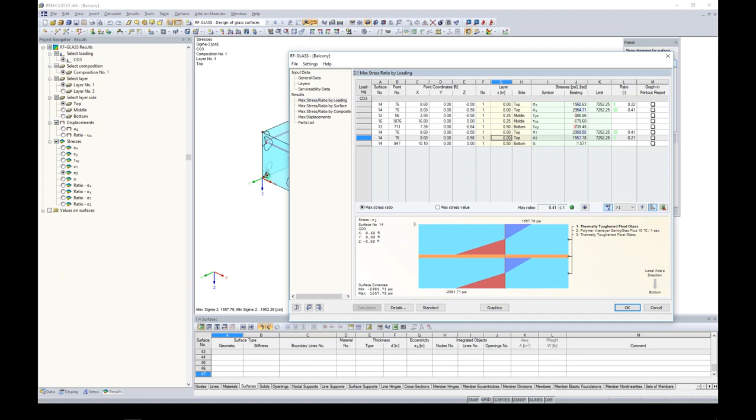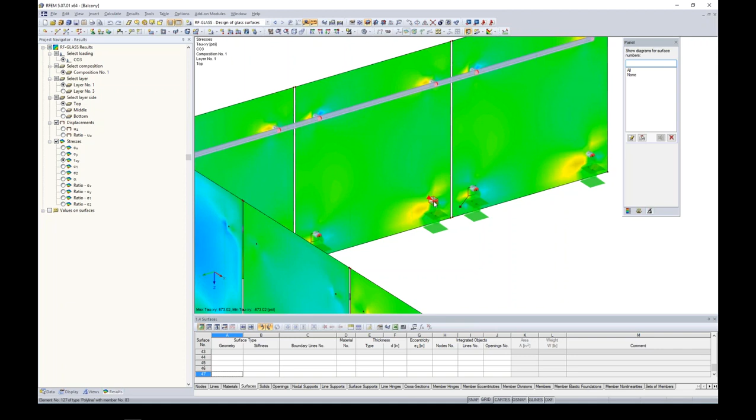Again, I can view everything graphically for my different stresses, which is beneficial. If I were to do a local analysis of one glass surface, I'd need to account for the stiffness of this handrail coming in as a nodal support, so it gets more complicated. I'd need to set these nodal supports with eccentricity taken into account. So there's certainly some benefit to a global analysis, but if you have very thick layers of glass, a solid element would give better results, or insulated glass—though in this case you obviously wouldn't have that. Just keep in mind global isn't always the option, but for a situation like this, it's fine to consider plate theory, and we get results for the entire structure.

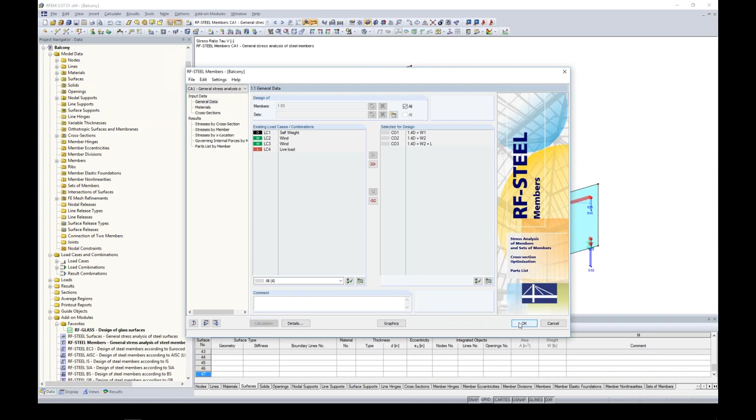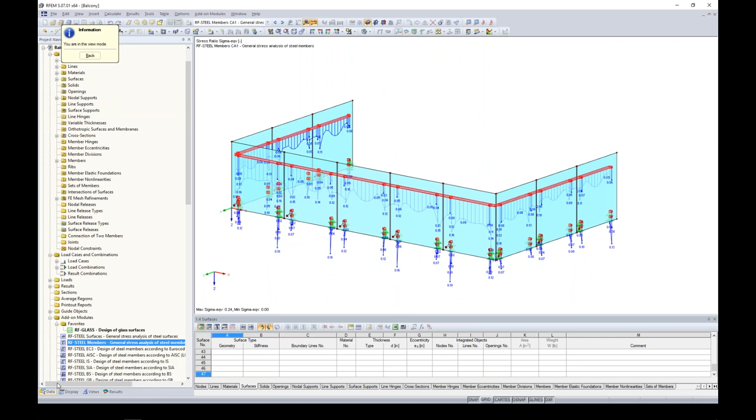The other advantage is tying it into other members in the model. For example, let's say we wanted to take a look at the results of our steel handrail. We have another add-on module called RF Steel that will give you a stress analysis of a steel section, comparing demand stresses to limiting stresses. With that, we can view the results graphically of any stresses and stress ratios for this handrail. That's what's nice about tying this into the rest of the model with a global analysis. That sums up the global options here.

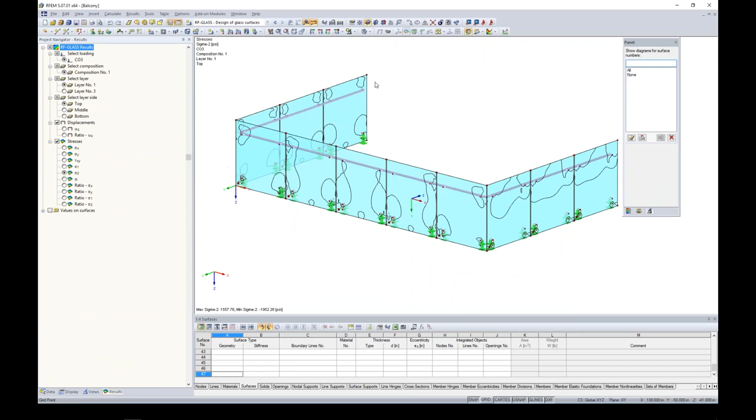One quick thing I wanted to show you guys, which I think is pretty powerful - let's jump back to our results here for our RF-GLASS. Let's say we wanted to print off all of these different pictures here for our contours of stresses. Normally in a lot of other programs, you'd need to take a picture, put it in your printout report, come back, change a view, take another picture, put it in the report. For us, we have this option called mass print.

You'll see the option mass print here. If I go into the details under my results, I see all of the results I'm viewing, and now I can select all of these stresses, including my ratios. If I click OK, maybe I need to set the size of my picture - I can set it at 50% of the page, that's fine. I click OK, and the program automatically creates all of these pictures for us and puts them directly into the printout report.

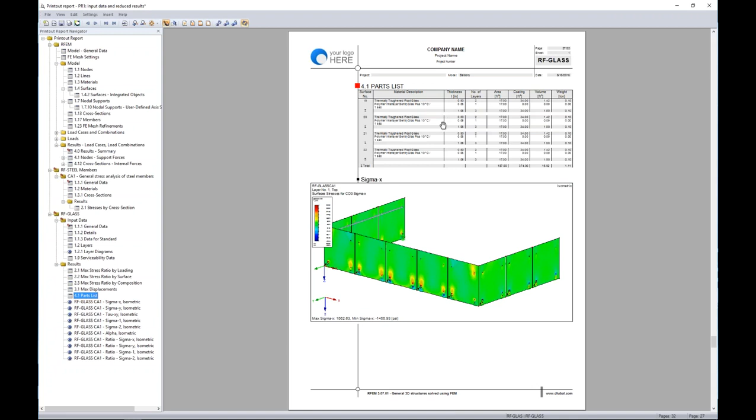I think our printout report is one of the strongest features, especially compared to a lot of other programs you're used to. It's laid out very nicely, and you can see here that the pictures were automatically put in based on all of those different stresses. I can jump through them in the table of contents or just view them graphically, and everything was automatically put in there.

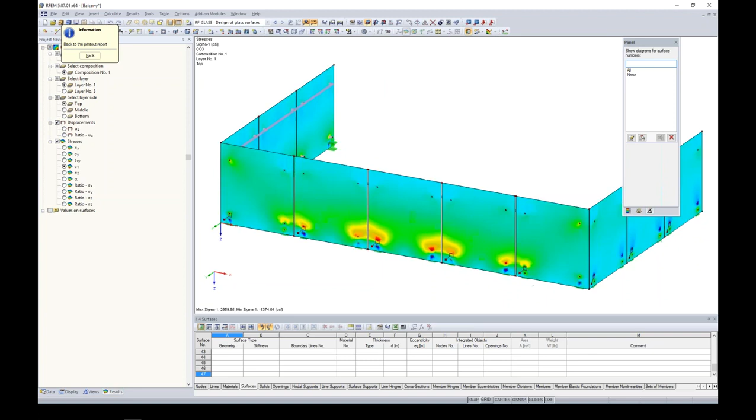Let's say for this one, I don't really like that view. I can click on edit, change the view to maybe a front view here, click back, and the printout report will automatically be updated with that new view, as you can see. The other important thing to note - if anything were to change with your model, let's say a loading, or you rerun an analysis, these pictures all update automatically too. So you don't have to worry about going back and reprinting them if any slight change was made. That's something really nice about our printout report.